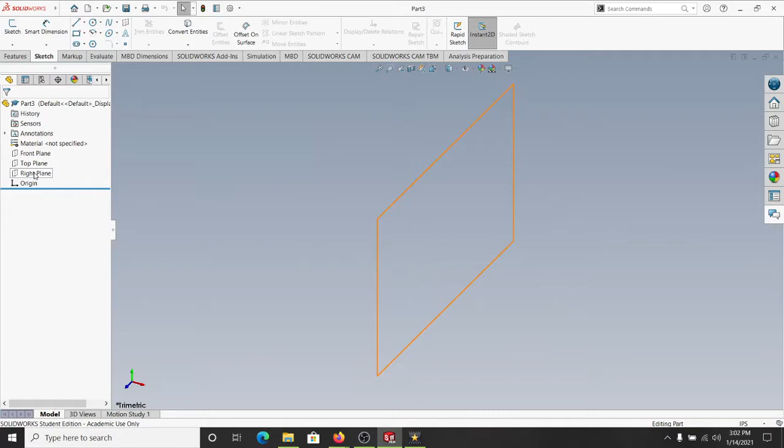So first of all, I want to start off with a new part, not assembly, not a drawing, but a part because it's an individual item. Say OK. And I'm going to pick the front plane, top plane, or right plane. I think I'll do a top plane, or front plane, excuse me.

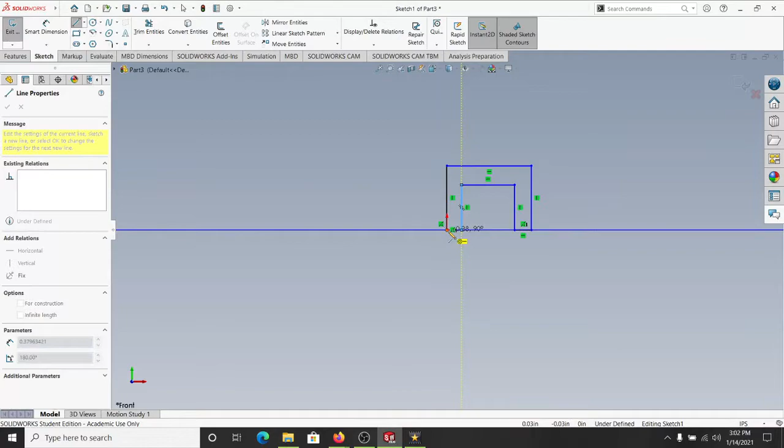And then I'm going to draw any type of sketch, just straight lines. And I'll come up here. Okay, so there's my basic sketch. As you can see, these green lines, these green relationships, the green means that this line is vertical, and if it's like this line is horizontal, so these lines will stay that way.

Alright, so we're doing the sketch. I'm going to add some dimensions to this. As you can see, horizontal, vertical, and fixed. Fixed means it won't move. So if I grab, it won't move any of these if I hit fixed. Now I can't dimension it or anything like that. So I don't want that.

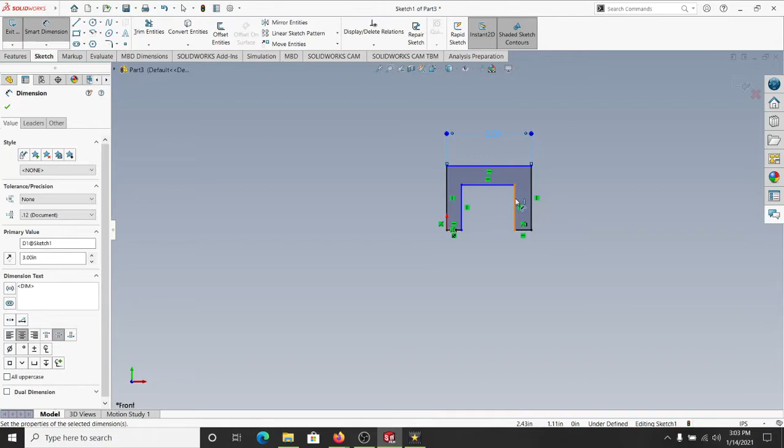Alright, so we're just going to say OK to that. That's our basic sketch. Now I'm going to go to Smart Dimensions up here. I'm going to make some dimensions from here to here. I don't know, let's make that 3 inches. See how I moved that over? This width and this width, I'm going to go with 0.6.

See how these lines turn black from blue? Once they are black, they are like fully constrained, which means we really can't add any more dimensions to these lines without having an error, because they're completely constrained.

So we're going to do this to here. I'm going to do 0.6 again. I'm going to make these all the same. From here to here, I'm going to make that 0.6.

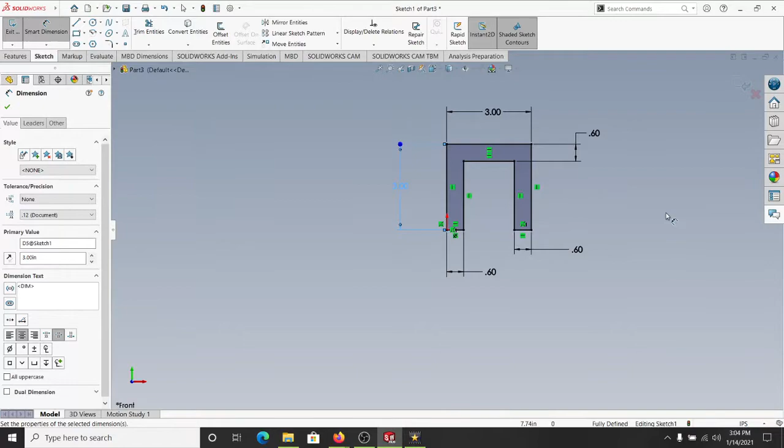Now, in order for me to make both of these black and be fully constrained, I have to add a dimension from here to this line. And we'll make that 3 inches. And now we have all the lines that are black, which means it's fully constrained. So there's no more dimensions we really can add to this unless we add more features to the sketch.

But at this stage, I'm just going to do a simple sketch. I'm going to say OK. And of course, we got the rebuild light on, so I'm going to go ahead and rebuild it.

So there's my sketch. Now, in order to extrude this particular sketch, I'm going to go over to the Features tab. I'm going to do an extruded boss or base. I'm going to pick up this sketch, and then it previews.

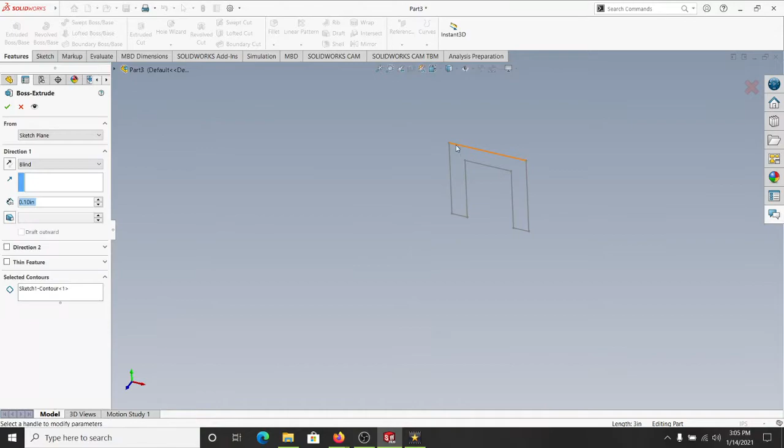This arrow button in the middle allows me to left click it and drag it to whatever length I want. I can put the length in here, say 10 inches. And then it gives us some other options here.

First of all, this is reverse direction, which means instead of going in this direction from the sketch, it'll go from this direction out. See how that changed directions? Okay, this here's our length.

This is a draft. If I want a draft or an angle on it, I can add that angle. Did you see how this gets smaller? At a 1 degree draft. I could draft outward also, which goes the opposite direction. I don't want any draft on this part, so I'll go with that.

Direction 2, if I click on that, what it's saying is this double arrow key here is I can pull it out from the sketch going that direction. Whatever, let's say 10 inches, just like the other one. So if you have the need for double direction, I can control that whatever I want. I can do 6 inches. So now the part is overall 16 inches long. But I don't want a second direction, so that's fine.

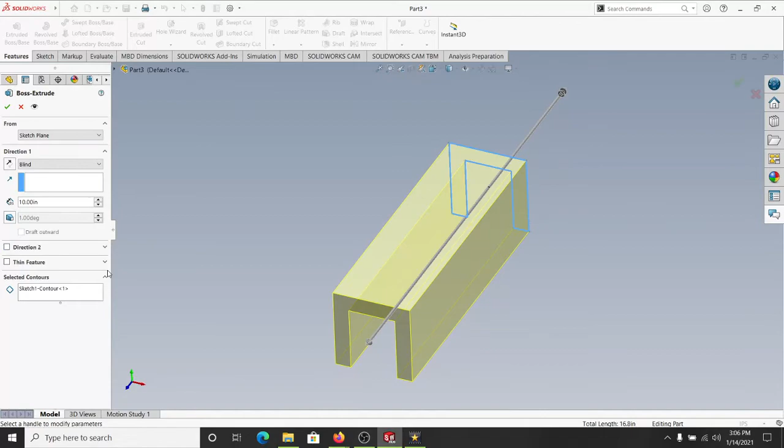So we're going to select this sketch again. We're going to go to Features tab. We were in Sketch, now we're going to go to Features. We're going to do an extruded boss, and we're going to do it 10 inches long.

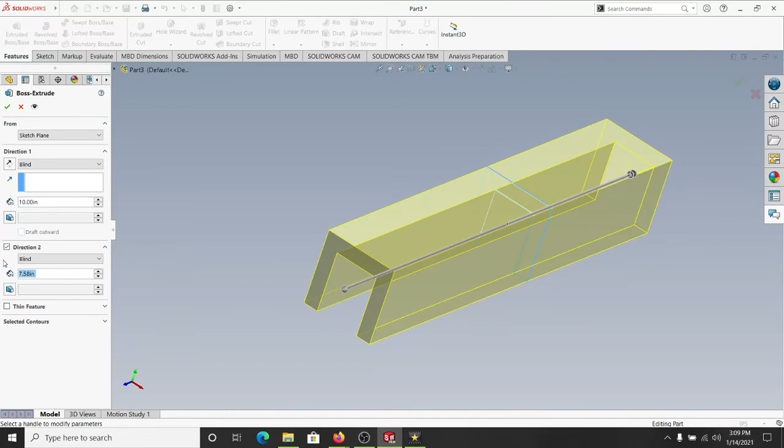And you have some options here. You can do one direction, which is this direction, second direction. We can go the other direction this way. I don't want that. And thin feature makes like a wall. I don't want that, so I'm just going to do a solid block. And that's how we create a solid extruded from a sketch.

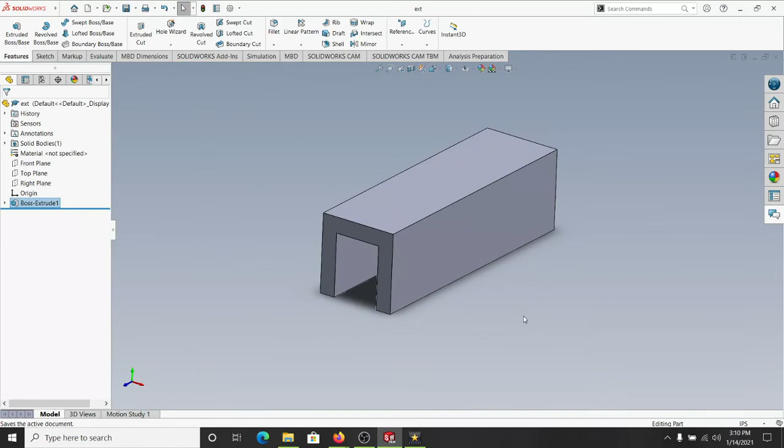Now I'm going to save it up here with the little floppy again. I'm going to save it as ext, PRT file, which we don't have to put in. It'll automatically know what we're building. And we saved it. Now we can close out the actual part and go back to Solidworks.